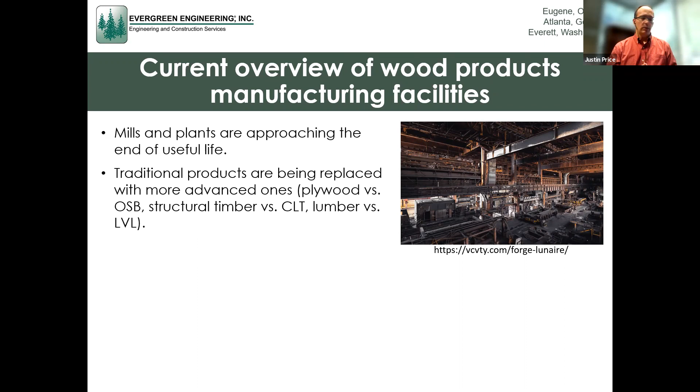Those assets - now you've got to think about replacing or upgrading those assets. Traditional products, of course, are being replaced. Obvious examples are plywood versus OSB, and structural timber - CLT is coming on the market. So those are some of the things we see within the wood products area. That's sort of where the wood products industry is.

Over these past years, we've seen a large number of new facilities being built. I can think of several facilities that have come online, between MDF and just a bunch of facilities coming into the marketplace. Lots of new sawmills, lots of new operations, and so they have this different stage of their life. We have to balance some old assets and new assets.

Adrian, how does that compare to what you see outside of the wood products industry?

It is a bit different because many of the processes in the forest industry are very large, while some other industries are more manufacturing cells. Replacing manufacturing cells within a facility or putting up a new line is much easier, much simpler, much faster than it is for the forest product industry. That was my first shock when switching industries recently - seeing how quickly they can come up with new technology, put it in place, make it operational, turn it to ops, and start production.

Here, for the majority of our forest products or wood products related industries, it's one very large process. Replacing a furnace is extremely difficult. Replacing a press is extremely difficult. Replacing a sawing system is usually very complex. So that's the main difference I have seen - these other industries are much faster to adapt to these changes simply because they're more modular.

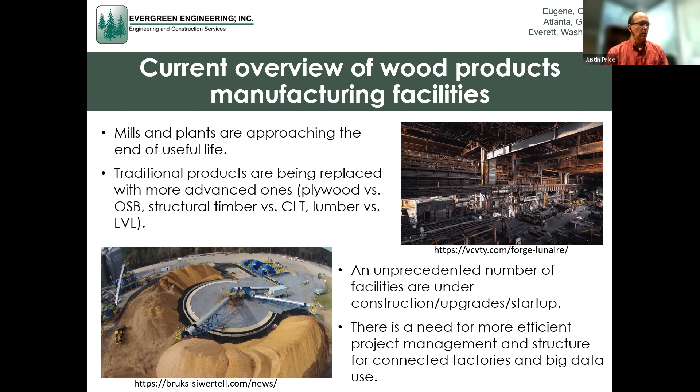I would agree with that. I've seen that in all the industries we work with, just in Evergreen. Think about the forest products, like the tissue lines - making the tissue itself on the big paper handling rolls is one side of that. Then if you think about the secondary manufacturing of the toilet paper rolls, those tend to be in that cell modulation. So that back end of a tissue mill is much more modular, much easier to replace those individual cells, as you talk about. I've seen that as well. That's a great analogy.

So what is Industry 4.0? I'll talk a bit about this, but Adrian, I want to hear from you - how do you think this is really going to change the world? What is it?

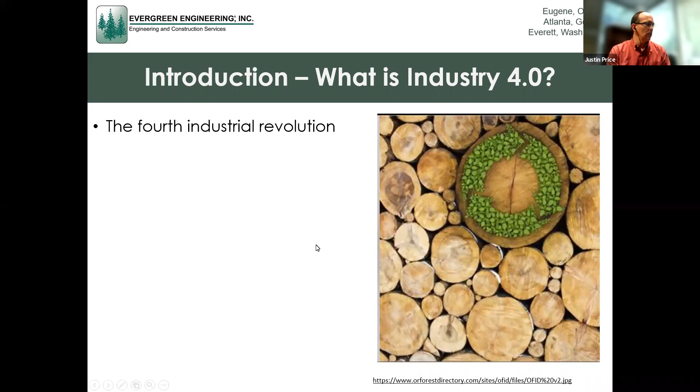To me, Industry 4.0 is that integration of data, which we've had for a while, but bringing in the artificial intelligence and machine learning aspect to it - machinery and communication, creating that specific kind of industrial ecosystem, that interaction, human machine, that changes from just pushing buttons to actually learning, understanding, and making changes on the fly, helping the operator as it's processing material.

So I think the key things, as I started digging into Industry 4.0 and how we've implemented it into wood products, there's a couple of things that really classify when you start moving into that Industry 4.0. I saw it firsthand in the lumber mills some years ago when we started putting in automatic grading machines - that was sort of the early deal, right? So now we have a machine doing automatic grading, but that's really sort of Industry 3.5, if you would. Industry 3.0 was really the adaptation of computing power into the operations.

And now when you can start having those machines making decisions for you within the operation, with an operator there to make sure the machine is operating in real time - but I really think that's not necessarily 4.0. It's just the automatic grader. It's when we started putting in systems that would learn from the mistakes in grading - to me, that's where you really start moving into that Industry 4.0.

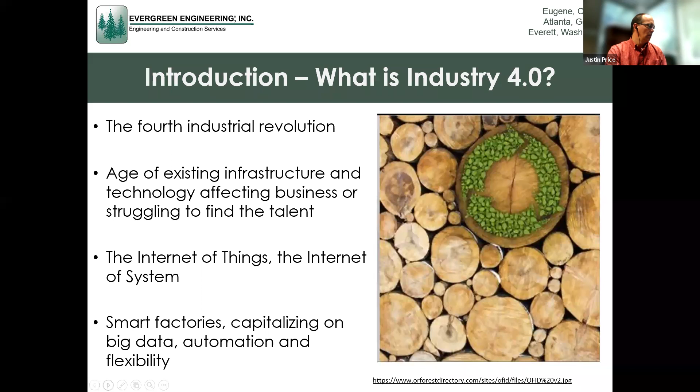And then as industry came along, we really got to this second industrial revolution, where we start thinking about Henry Ford and his mass production, using machines to really move industry along. That really became the first assembly lines and those sorts of things, and that was in the late 1800s, early 1900s.

And that lasted all the way up until the late 60s, early 70s, when computing power started to happen. That's when the third revolution came, where we now started getting insight into our process. All the data becomes available to us. PLCs start to be available, home computing. And now we're looking at where we are today, in the early 2000s or mid-2000s or whatever, combining all of that.

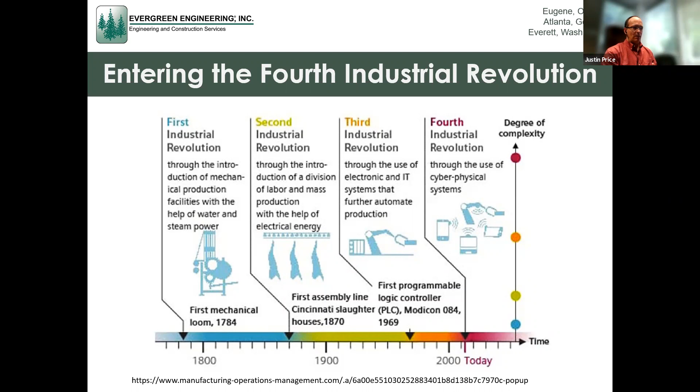Again, just another sort of pictorial. We're entering it now, and hopefully that's another visual for you guys. Adrian, anything you want to add to any of those things that I sort of didn't touch on?

I would just add that the word complexity should not be scary for us. We're not asking anyone who works in the facilities to become a programmer overnight and gain those skills. The word complexity is just everything that goes on behind the scenes now that makes all that information we weren't able to grasp before digestible for us. It kind of gives us a roadmap or a way for us to make decisions and understand what's happening, and find root causes that otherwise would have escaped us.

And that's a great point too. I think when we talk about how we move into that complexity, you might say, well, I've got operators and now they need to become programmers. Not really, because that's the beauty of where we are. There are technologies in software packages and other things that get implemented that really make it visual, right? So we have all this data. How do we visualize it? And how do we help make decisions? I think you're absolutely right. That's a very good point. I really like that. There's a lot of complexity behind the scenes, but the user interface is simple.

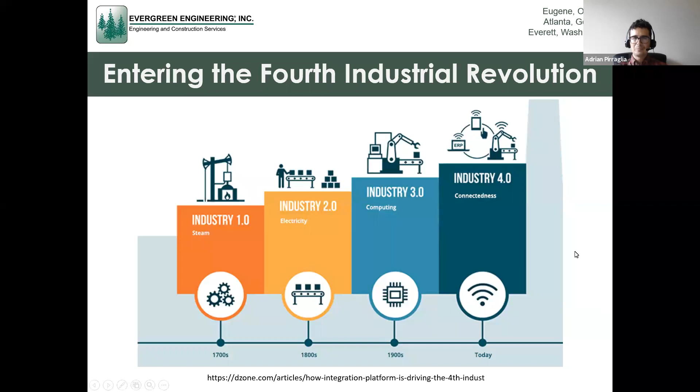If you think about the computer, here we are on a Zoom call. The technology that got us here was pretty doggone complex, from communication and optic cabling to Wi-Fi systems, to laptops, to networks. But yet all I did was click a link, and next thing you know, Jennifer let me into the presentation. So pretty easy on my part, but there's a whole lot that goes on in the background too. Great point, we appreciate that.

So let's talk about some of these risks. Adrian, why don't you walk us through some of these risks and challenges that you think we are faced with?

Well, what I've seen in my short career in the forest products industry is, as you mentioned before, aging equipment, new facilities coming up at an unprecedented pace, and the complexity of the projects has just skyrocketed. There are so many aspects. Now we have so many tools that are supposed to make our life easier, but we have to connect the dots correctly to make them work. And there's some lack of preparedness that I've seen in the industry for these highly automated systems. It seems like there was some lack of belief that this would catch on and dictate our future, and it turns into a highly increased risk of failing at these large projects.

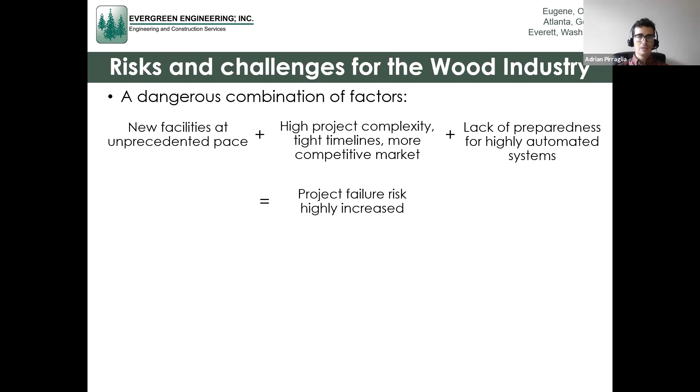As I pointed out before, there's a factor of an aging population and change in the way we work. We've seen it with the pandemic. A year ago, this caught us completely off guard, and how much of the issues with pricing we're seeing, the issues with availability of lumber and other materials like sensors and chips, how much of that could have been avoided had we had some of these systems in place, so that remote work, remote monitoring, and remote changes would have been possible. Just think about that. Right now we're seeing this whiplash effect in which the supply chain is completely disrupted, and we're trying to get it back on track. But how much of this could have been avoided with more preparedness to the complexity of Industry 4.0 and how we can monitor and make changes to equipment remotely?

Yeah, I'm going to use a computer term here. Let's just double click on that for a second and dig into that conversation a little bit, right?

What I see is our industry is a heavy industry, and we have to be very present within that operation. Going back to our analogy of grading lumber, I have to be there as a lumber grader to put my hands on the lumber, flip it both sides, and do a visual grading of that. Our operations in wood products, our team members, our facilities are set up so that they have to be present inside that.

Whereas we look at what we're doing in terms of remote work and remote systems, we're scattered all over the US and maybe abroad today, and we're here all together collaborating on this webinar.

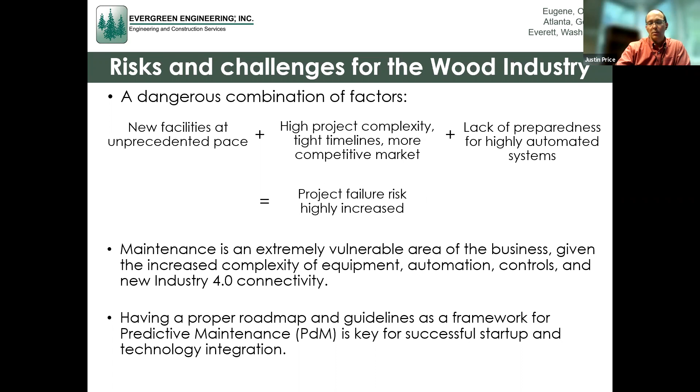As we think about where we are today in wood products and how the pandemic has forced us to move into these technologies of remote work, I think we have to consider how we build these smart factories to allow for more remote work of employees, not having to be there. If industries are able to operate in a more remote work setting, they can accelerate and maintain their production through things like this, versus a very hands-on operation. What are your thoughts on that, Adrian?

Yeah, absolutely. You're right. The forest products industry in general is a very present industry. You need the operators there.

One of the issues is, as soon as this pandemic hit, you get a combination where people are trained in just one area, usually, and that person cannot be present, so you have to shut down instead of being able to operate with half of your personnel on site, half remote, having that social distancing that allows you to safely operate within the parameters of what we're living through today. We might be dealing with this for years to come. There might be small focalized waves of the virus in some areas, and some factories will suffer that. So adapting to that half remote, half present could be key for near-term success.

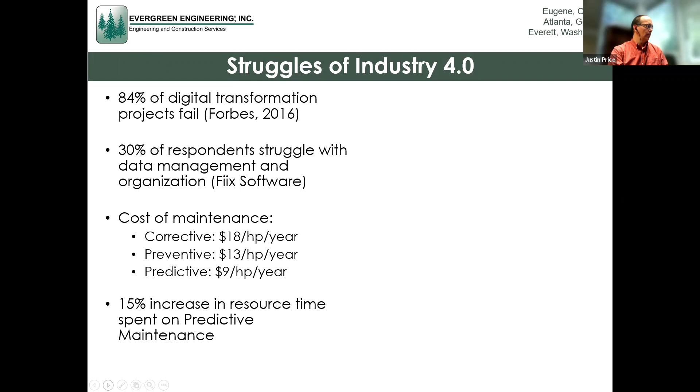Absolutely. So we've touched on some of these struggles and where we are, and these are some of the data, Adrian, that we pulled together. I just want to go through these at a high level. For emphasis of time, I don't want to spend too long talking about how bad the industry is, but hopefully we can highlight where we see, from my perspective, the work happening and where we see the forest industry moving, and put some food for thought out there.

If we talk about moving into this, we have to recognize that in digital transformation, 84% of these projects tend to fail. So this is not something easy where you just buy a piece of software, put it in, and the world's happy-go-lucky. There's some real risk there.

30% of respondents struggle with data management. That's like, now I've got all this data, I can't see what I want to see. So it really takes some insight. I think what I want to highlight in all of this is that commitment. It's not a one and done when you implement these programs. You really have to have someone in your organization who embraces it and can spread that through the organization as part of the culture.

Correct. Back to your question on where we see an area that will definitely positively influence our industry, that will be maintenance. That's why maintenance is mentioned in this presentation so often, because we have had quality data for quite some time. We know all the mechanisms to analyze that data. We have done it with supply chain fairly well. But maintenance seems to have been left behind.

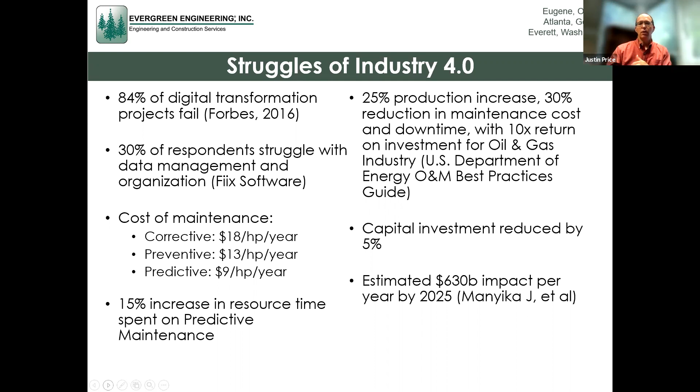When you can move a culture out of the firefighting, just reactive every day, into more preventative and planning, that's step one. Now, as you start to move out of that, once you get good, robust predictive maintenance systems built, now you're starting to get the data from that, and you can start applying technologies to that data.

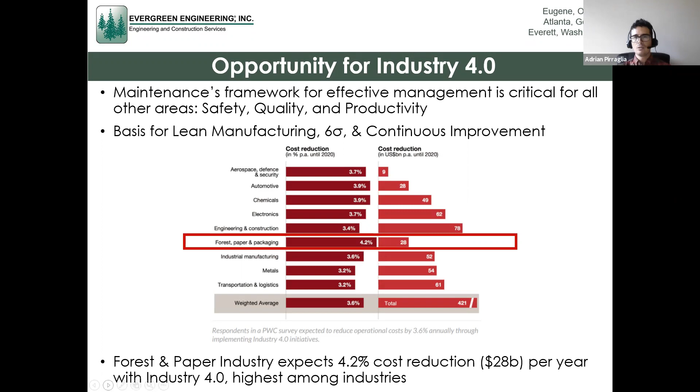Correct, and that plays a big part. I think in previous years, we've had a lot of failure mode data that has been faulty at best, and you know, garbage in, garbage out. If you have data that doesn't really work, your digital transformation will definitely fail. So having that baseline in which you can move on to predictive maintenance based on solid and sound information is key. It's critical, and that's where that reduction in maintenance time and increase in productivity will come from.

Yeah, and this is sort of the opportunity. I want to talk a bit about that. How does this really happen? I go back to the days when I worked in the mills, when we would roll out these programs and start getting our maintenance guys involved, and we started getting into this predictive level.

So what we started to do on these things is say, okay, well, I've got a cylinder, for example, and we know it constantly breaks, and we never know when it's going to break, and it breaks down in the middle of production, and we have to get in there and replace the cylinder. So we started to put some trending on that, just collecting some data. And what we found is after so many strokes of that cylinder you would have a pin failure.

And that failure kept happening. So then we beefed up the pin, and we got longer lives. And then we started thinking bigger picture, like, well, why don't we just start changing that pin out before the failure, during a maintenance period?

And so that's step one to me. The next step would be, well, do I always need that same pressure on that cylinder to move it or make its position happen, which reduces the forces on it? And so now we can start really thinking intellectually about what that mechanism is doing. That's when you start getting into that Industry 4.0.

Moving on, Adrian, let's talk a bit about what the opportunity is. Where do we see it in the forest products and paper industry? This is out of some data we pulled. Maybe you can talk about what we're seeing here and the benefits of it. Well, where I see the opportunity, of course, is in maintenance and predictive maintenance in particular. But where I see the biggest issue and the biggest opportunity for us, or the lowest hanging fruit, is what do we have in our facilities currently?

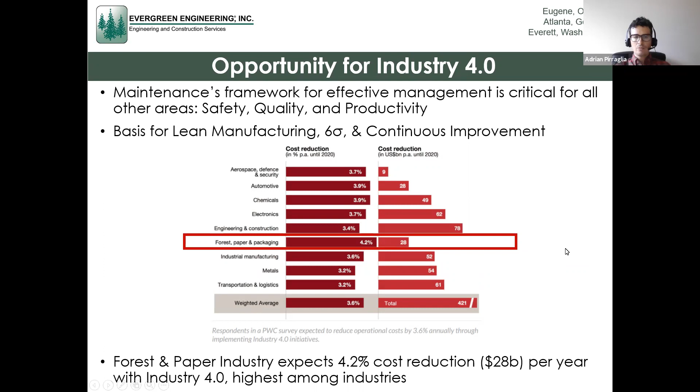Correct, and it's a lot of legwork for current and existing facilities to get that data, to get accuracy on what they actually have in the plant. But it makes a whole difference. It makes an incredible difference when you know exactly, hey, this part failed and this part was made by this manufacturer and it's on this diagram and this is the installation and changeover procedure.

And if the part is obsolete, that's where Internet of Things and some other systems will come on and will tell you, hey, this part is obsolete, but there's a replacement part, a higher grade, a different part that you can adapt to this, giving you that accessibility to things that we currently don't have.

Yeah, so we've talked a lot about the maintenance, we've talked a lot about data collection, and I wanted to put this into perspective, if we can, and sort of what does this look like, right? So really there's 3 main areas that really come down into one centralized section.

We talk about in maintenance, like the hierarchy of equipment and what's critical, like Adrian just mentioned. This bearing is very critical to our operation. This is the part number. We got to make sure we stay on top of those.

The next area of that is sort of like, what are our KPIs? How is this supposed to operate? As an operation, we need to know when we're at the rate that we need to be when we're running, and where we are compared to that. Those are all the KPIs that we know, and we've done a lot of those on the quality side, as you mentioned, but we also need to recognize that from a maintenance KPI as well.

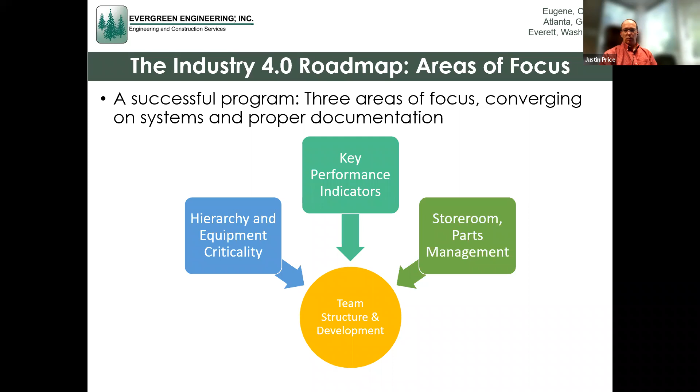Correct. And then we move into the storeroom and the parts management, right? As you said, now we've got this big storeroom, and how do we automate that? How do we bring that together? But really, I think it goes back to that team, that structure, and the development of those teams and structures within your organization. I think this slide to me is really sort of the inputs and the outputs of an Industry 4.0. Yes, absolutely.

So what does this look like? Obviously we want to talk about a well-structured management hierarchy, right? So as you build those systems, how does this look in the maintenance programs? This is what I typically would see in a maintenance type operation within those. Adrian, how does that compare to what you see in your current operations?

It's also the controls part, and they focus a lot on feedback loops and trying to understand how changes upstream will influence the variables or these KPIs we're measuring downstream. And if we're seeing an issue, how can we either prevent it from complete failure while we find a replacement part, or stop it on time so that the failure is preventable altogether.

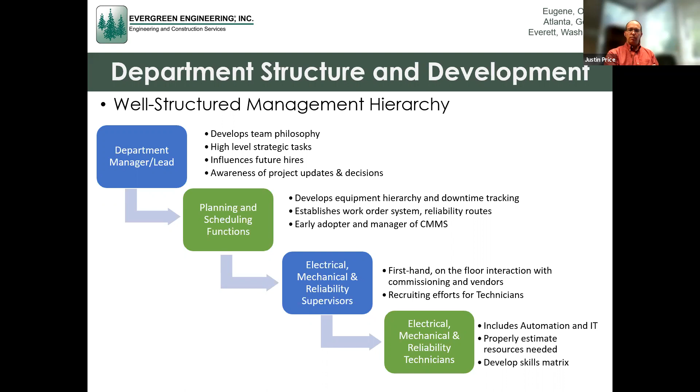So let's talk about that. Another important aspect here is... we'll skip over that, I forgot to take off some volume. Let's talk a little bit about storeroom and parts management. Hang on one second. I apologize for that. Adrian and I had been recording some things, and I forgot to. Not a problem. Hey, Justin, while you're resetting, I'm gonna throw out this first question that we had.

Scott Leavengood said he'd heard it described that Industry 4.0 is increasing the amount of useful information we get from all the data being collected. I would add to that, does it also mean that we're going to try to weed out some of the less useful information that we get?

Go ahead Justin, I was going to say, why don't you answer that one for us? I will say yes, you weed out some of that information that is not useful, but it's not eliminating it from your systems. You never know at what point that information could become useful. Storage capacity at this point is not a big issue, especially with cloud computing, and processing power has skyrocketed. So it's not just eliminating it, you keep it there and make your equipment and software learn from it and determine, after 1,000 iterations or 10,000 hours, that this particular piece of information accounts for, say, about 5% of our failures - just a general example. It might not be significant compared to something that's 20% of your failures, but at some point it could become extremely useful.

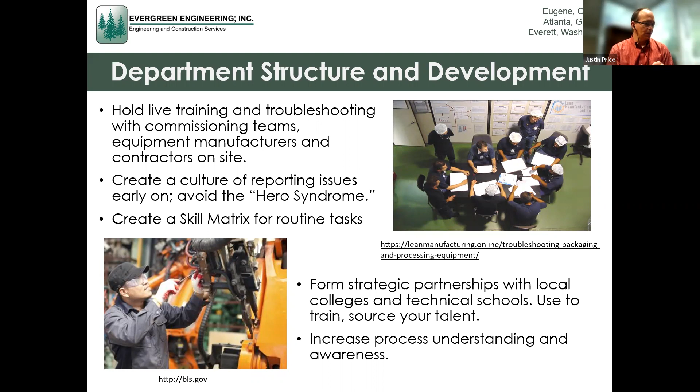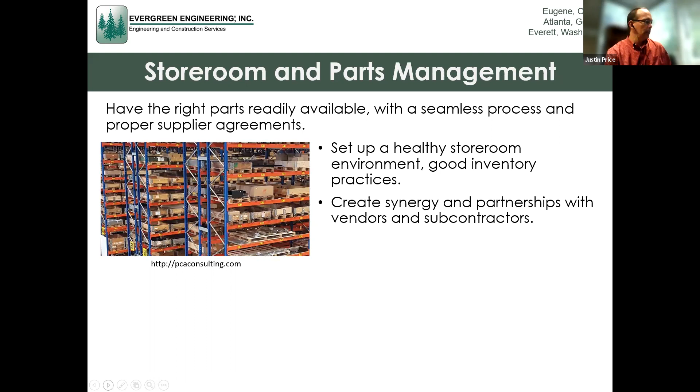Let's talk a bit about the storeroom and part management setup behind the scenes. Adrian, tell me a little more about what you see happening with these systems.

Well, what I've seen in many forest products facilities is the difficulty in finding parts and understanding, through this integration of systems, hey, if this bearing failed, where do I have it or where can I procure it? Do I have long-term contracts with my suppliers so that they stock it and I'm not paying for having it on site, especially if it's a high value part? But I have it available within an hour or within a few minutes. And that ties back to what I mentioned on that baseline information you need to have up to date, going back to your drawings, your BOMs, your bill of materials, your part list. Understanding all of those and having in place a good supplier contract that will allow you to quickly respond to your part changes. That's extremely critical.

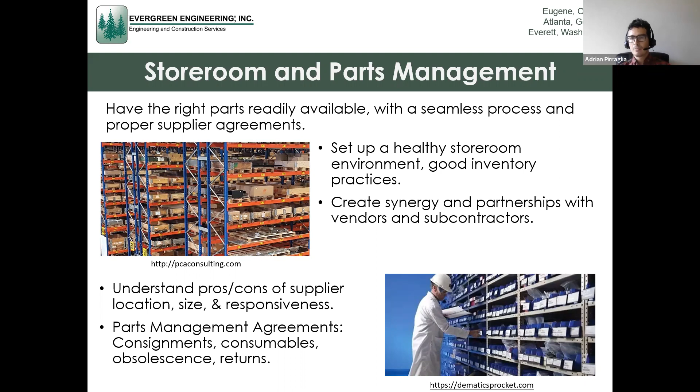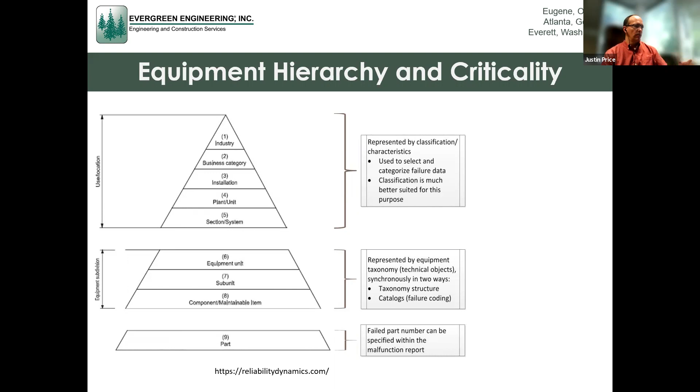So we'll talk a little bit about the hierarchy of that system, right? You have your parts list, your bill of materials, and things of that nature. This is really how that gets implemented. You have, for example, a bearing, and then you know what equipment or sub-equipment that's on, which is the next step up. And then you know its primary uses, like its business categories and things like that. How do we manage that? Talk me through what we're seeing on this hierarchy.

Well, basically what we see in the industry very often is the base of the pyramid. We understand what the part is, we understand it's a bearing, maybe we understand the part number, we understand where it goes. But then as we start going up this pyramid, we start losing traceability of, well, which subunit, which equipment unit, is this part current, can we procure it quickly? And all of that plays into how quickly you can respond to issues.

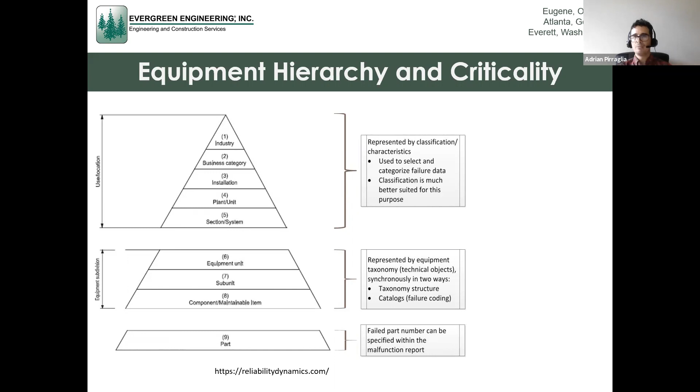I will say that for these items, it's extremely important to have all the components working together in unison at some point, especially when you understand the criticality of your equipment. If it's not a critical piece of equipment, well, that's not your number one pillar, the one that sustains the whole house. But you can have some flexibility on those. Definitely on those critical elements, you want to have that complete pyramid of hierarchy there. Yeah, absolutely.

So let's talk about a few KPIs. In this, it's KPIs and a couple of dashboards here, and you talk about the asset utilization models and things of that nature. And this is really geared towards the machine and the hows, right? So this is really how you move into it once you understand the KPIs. Is that sort of what we're talking about here?

Yeah, and also understanding, and having your systems programmed in a way to understand, hey, which are leading and which are lagging indicators, which ones I'm going to see after the failure or after the change, and which ones I'm seeing as a symptom of something that's currently happening. And this ties back to, can I predict that? If I can predict that, and if I tie it back to my storeroom and to my suppliers, can I understand that next week I'm going to need that bearing from this supplier, so I better get it ordered now, because it's coming from the other side of the country.

So that integration is critical. And depending on which supplier you have, they currently have integration software and systems in place to provide you with that service, and they will get notified probably before you do that this part is about to fail. I've seen a lot of, and bearings is a great example, softwares telling you exactly the failure mode and when that bearing is going to fail, having that sensor right there, and it will give you that indication, and it will alert your supplier, and it will tell you, hey, this supplier has two of them in stock.

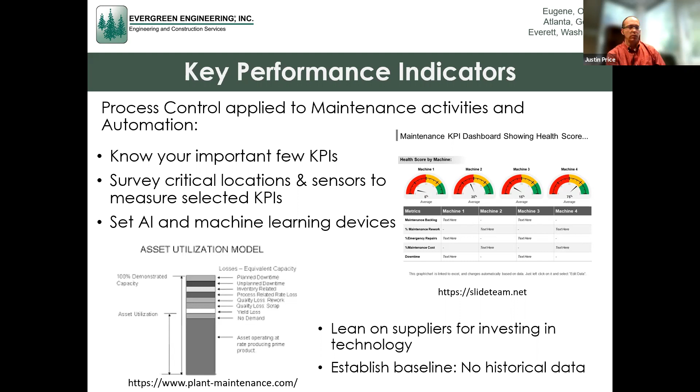They say, oh well, we just had a run on toilet paper, we should probably go order more. Just by the time they move it from the warehouse, crossing through a scanner to put it out on the floor, that triggers the information out of the warehouse, saying hey, we've just moved 5 crates of toilet paper out, we better go replace those because now our inventories are low. So there's a lot of technologies that really indicate this from a manufacturing and operational point of view.

Going back to the KPIs on your suppliers, there's a fundamental change I see in all industries as of today, and that's the switch from purchasing a product - you purchase the software, you purchase the sensor, and that's it, you monitor - to purchasing a service. So instead of just purchasing the software and having to purchase new software two years from now, you see it with Windows. Windows 365 is not a system where you'll buy Windows 366. Now you pay an annual fee and you keep getting the upgrades to that system, and you keep getting the service.

So there's a fundamental change there in which now your suppliers of parts are providing you with software that comes as a complete service agreement. It's that switch - it's not just a product, it comes with the whole package.

And I think that leads into this next one with these systems and documentation. Now you're starting to see CMMS systems that aren't just the old school way of putting it into the computer, where somebody managed that data, somebody had the parts hierarchy put in, and you went and pulled a work order or whatever you had in your systems to do that work. Now you're starting to see integration of that knowledge of those systems, being sort of a service to the industry. Correct, it's a great example of that.

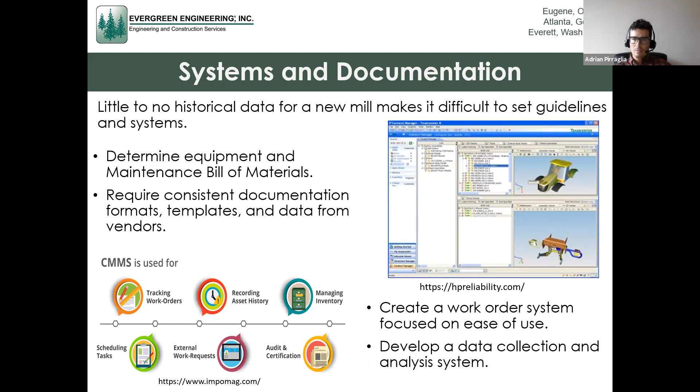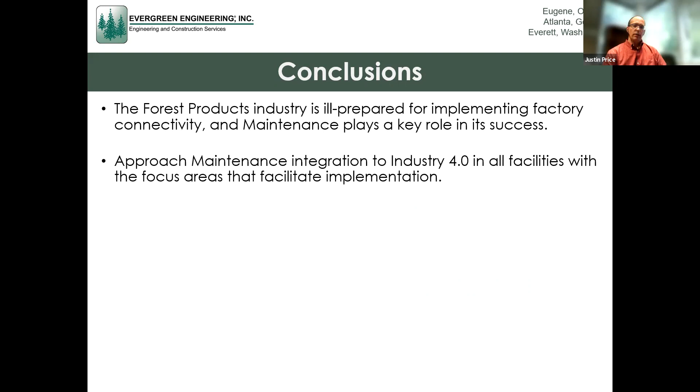So getting to the end of it, I want to wrap it up real quick with some of the conclusions, and then we'll open it up for questions and conversations. Adrian and I have been bouncing things back and forth - to sort of wrap up this whole thing, where I see the industry, what I've lived and worked through, is that we're really not in a position to move into that direction.

Because we've sort of been old school - this is the way we've always done it, we're going to keep doing it. So we really have to move our industry into the next level of that integration. We're starting to get there, we're starting to see Industry 4.0 with the newer facilities - they're more implementing the hierarchies and the part management and those sorts of things.

Again, some of the areas to focus on are product, technology, logistics, data integration, organization, and human resources. On the surface it's really easy to say, yeah, that's 4.0, I get it. But it boils down to this: if you don't get it and adapt it within yours, the competition is. The newer facilities, even some of the older operations, are really starting to move in this direction, so from a competitive point of view, you really need to be thinking about this.

And then lastly, a classification hierarchy - you really got to be sure you get the fundamentals correct and done with that. Adrian, anything else you want to add to that?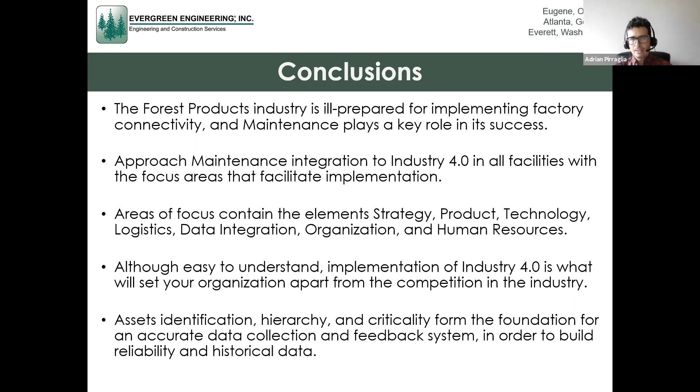I would just add that Industry 4.0 allows for increased traceability on every aspect of the business—not only parts, maintenance, and quality, but where your product ends up, how long it lasts, when it was produced. You can understand if your product is still performing well in the field 25 years from now, and go back to understand what happened that day in manufacturing that made it last so long. That's a key element I see playing out in the next few years.

This last slide is just some closing thoughts and arguments, and I'll leave that up here for us to read through as you guys think about questions.

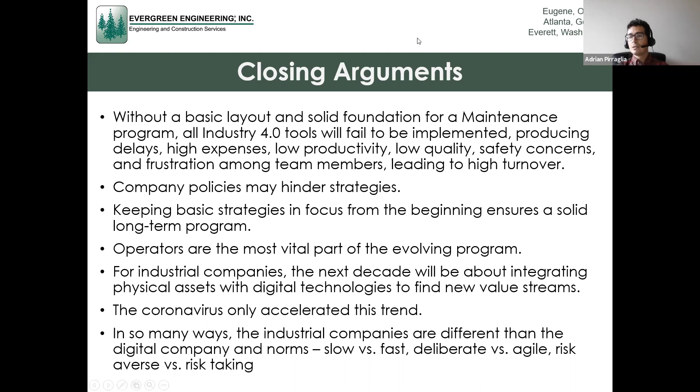One of the issues it faces is that your facilities are closer to your resources, so they're in rural areas. How can you recruit for those areas? That's the biggest challenge I could see. And when you recruit for those areas, you understand there are skills that these operators and this workforce need to be trained on, and a lot of that plays into Industry 4.0. We've seen it now in a lot of maintenance training, we're moving towards augmented reality to improve the way you train, and that could play a key part in capturing that talent.

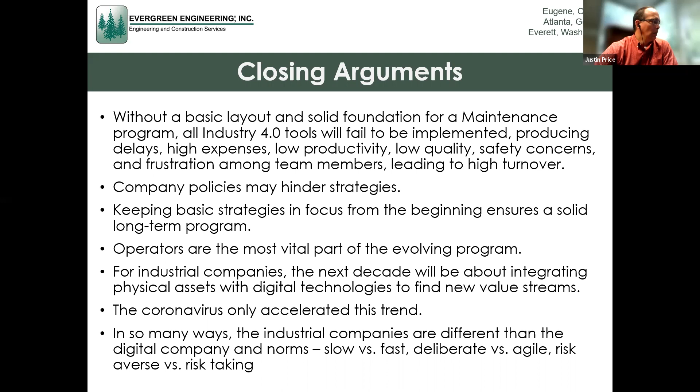Absolutely. Well, anything else, Chris, in the chat? Any other questions from the group? That's all we've got. If anybody would like to unmute and turn your camera on and let us see something other than that black screen, you're welcome to join in and post a question. How are we doing on time? I haven't looked at the clock. We are right on time. Yep, it's about time to wrap it up.